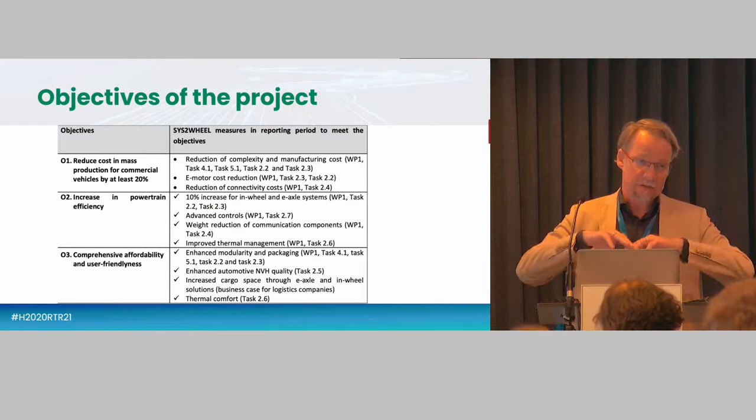Increase in powertrain efficiency - we get a little bit of increase from these components, but the vast majority of efficiency gain comes from efficient and advanced control. Weight reduction is another goal: we took many components out of the demonstrator vehicles, and of course added some components in, but in total we achieved a weight reduction.

The comprehensive affordability and user-friendliness - here we have to consider the special business cases for commercial vehicles and logistics companies. So the business cases require as much cargo space as possible and as few stops as possible due to recharging.

We, as Sys2Wheel, are part of a cluster of European projects where colleagues present their work. It's called the Evolve Cluster, which has its own homepage. For the projects on the list in this cluster, you find dissemination material, newsletters, and quite interesting results.

Going into detail of Sys2Wheel, we are currently looking at the N1 category vehicle - remember, this is the Fiat Doblo. The Fiat Doblo is equipped with an in-wheel system: in the front we have 2 in-wheel motors, and in the rear this special damping system is placed, where we freed as much space as possible for additional battery.

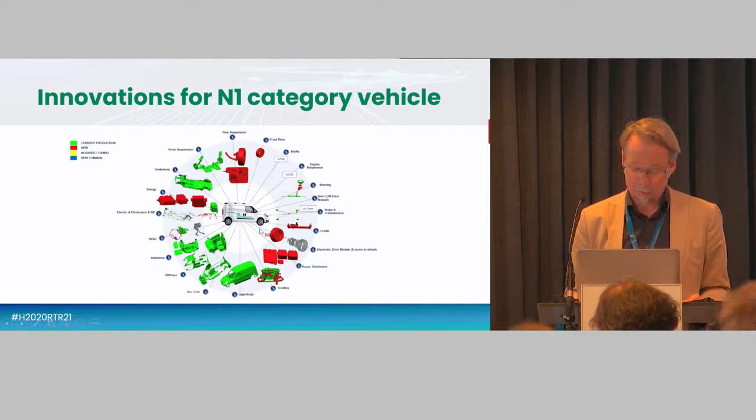Red is new, coming from this project. Green is the current production of the vehicle. Here you see the damping system, and here the in-wheel motor. The damping system has a very odd-looking design, I would say, but it has been tested for NVH issues, vibration issues, and mechanical properties, and is considered safe for automotive production.

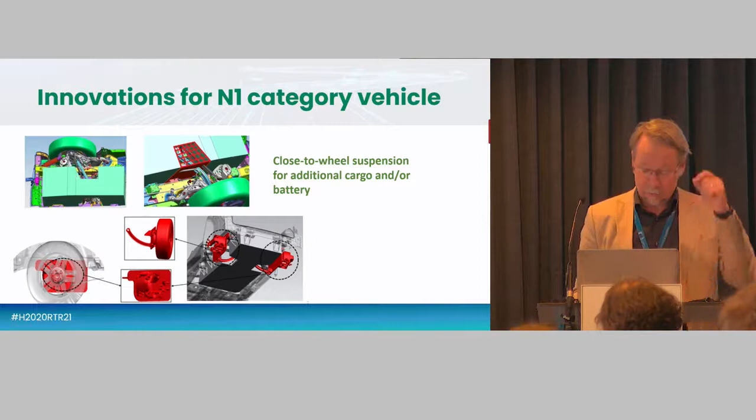Freeing the space in the center, here you see additional space available for the battery where no cells or modules could be placed before this development was installed. Here again you see the in-wheel motor in front, with additional battery space also here in the front, increasing the range.

Here you see a snapshot of the in-wheel motor production line, a specially designed machine where manufacturing is reduced to a minimum, and automated production of this e-motor is considered. The e-motors run on 400 volt DC, and are roughly about 74 kilowatt power.

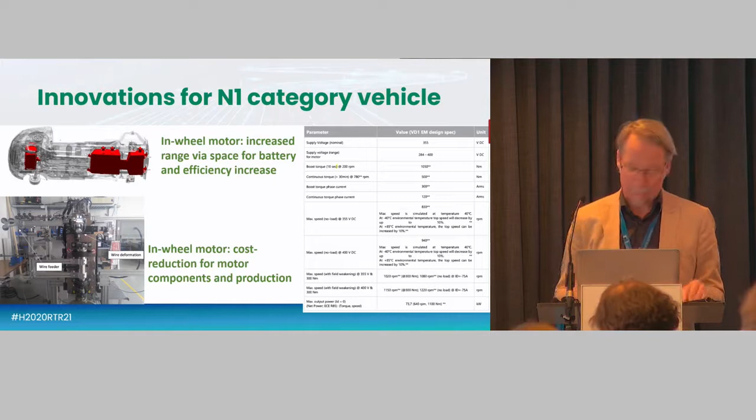So the vehicle is produced and assembled - so far we got in this project with all the innovations. Here in the rear you do not actually see the damping system, but what you see here is the in-wheel motors in front with additional space for the battery.

A new cooling system has been developed, also reducing weight to a certain extent. The inverter components in the underhood have also been developed by Elaphe. Additional features of this vehicle include improved thermal management, as I mentioned before, and a time-sensitive network.

The time-sensitive network - here especially we focused on in-wheel communication between components. The time-sensitive network enables safe communication in the vehicle using existing power lines, without the need for additional communication cables, freeing space and reducing weight by reducing cables for communication purposes.

Coming to the N2 type vehicle, the main innovation here is a fully modular e-axle system. So here you see a sketch of the e-axle, and this has been produced and currently integrated into an Iveco Daily.

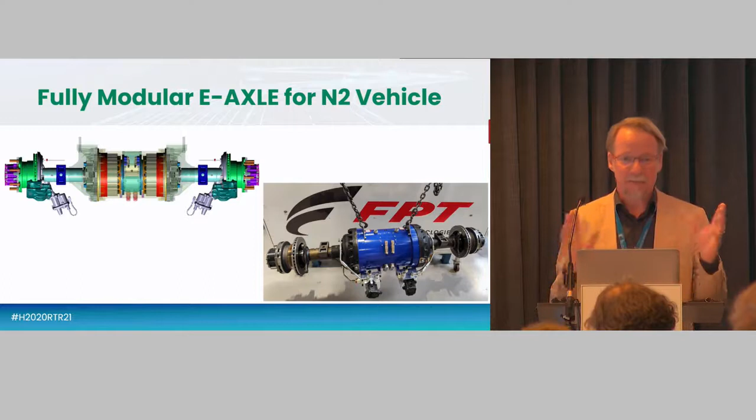Another feature is that the e-axle consists of two different motors that can be controlled separately. This means the e-axle can also realize some torque vectoring. Question is if it's needed in inner city traffic, but anyway, it's possible.

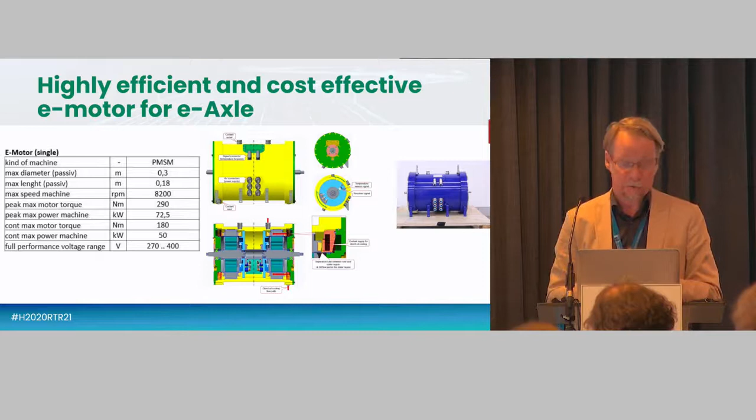Here you see the motor of the e-axle. So again, some 72, 74, 73 kilowatt peak power machine, and it runs on 400 volt DC, with an inverter in between, of course.

So, mid to long-term expected impact. These are, of course, the impacts that are required in the call text of the GV01 call, and which we meet, of course. But the more interesting thing is what happens also as some kind of side effect.

Of course, we have this from Elaphe, the in-wheel motors, and the market uptake here, the increase in the number of motors sold. Elaphe has already started to produce this type of machine and is trying to integrate it into other vehicles as well. The same for AVL, but there the motor is a completely new development, and this has to be tested. There have been some issues due to COVID-19, so the tests are still lacking.

For the FPT side, this fully scalable e-axle system is foreseen to be put on the market end of this year, beginning of next year. For Iveco, of course, the zero emission vehicle for last mile delivery is a selling proposition.

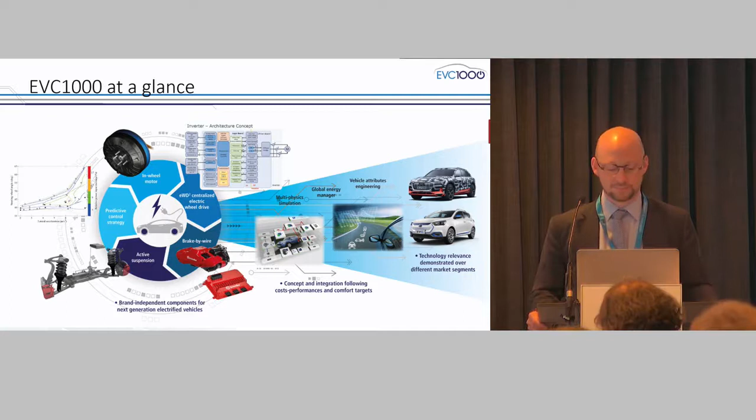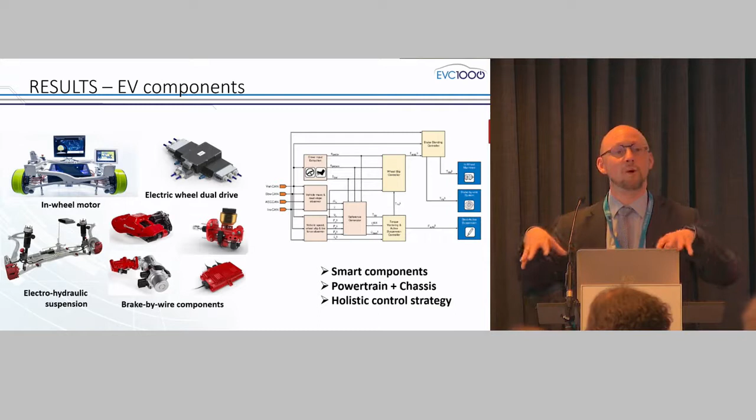In terms of results, in-wheel motor with a target to provide higher performance directly in the corner, to provide corner solutions for electromobility. Electric wheel dual drive with a target to have a better, more accurate and synchronous control of the e-motors. We will have as well a brake-by-wire component, in order to have more flexibility in terms of braking, and very similarly electro-hydraulic suspension.

For customer acceptance of electromobility, we need to improve range, reduce the cost of the battery, and take into account comfort and drivability aspects. This is the target to provide different kinds of components for the powertrain and chassis, providing all of them a higher degree of flexibility, and a more advanced and more integrated control strategy at vehicle level, to optimize locally the efficiency of the single component, and to optimize globally at vehicle level for a specific market, for a specific vehicle target.

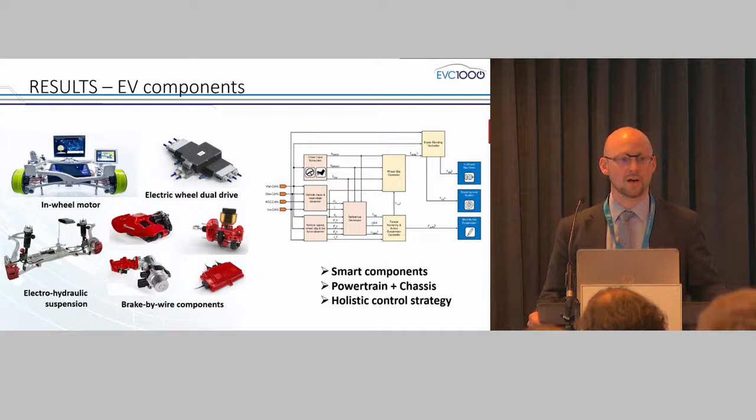Moving to the results, we are in the phase to finalize vehicle demonstration. This is ongoing work, a real picture. On the Audi vehicle, you can see on the left part the front corner with the brake system and the damper system, with Brembo and Tenneco. On the rear axle, the dual inverter mounted from Ideas & Motion, and on the rear corner, in-wheel motor, damper system, and EMB caliper as well.

We are in the phase to finalize vehicle demonstrators. We are in the phase of going for homologation in order to be in a position to make a 1,000 kilometer drive on public roads and showcase that these components are sufficiently mature for later exploitation, and are really in the position to achieve the targeted project objectives at the end of the day.

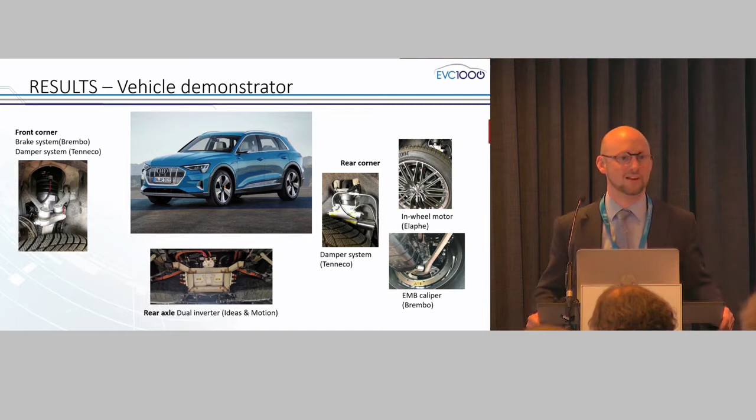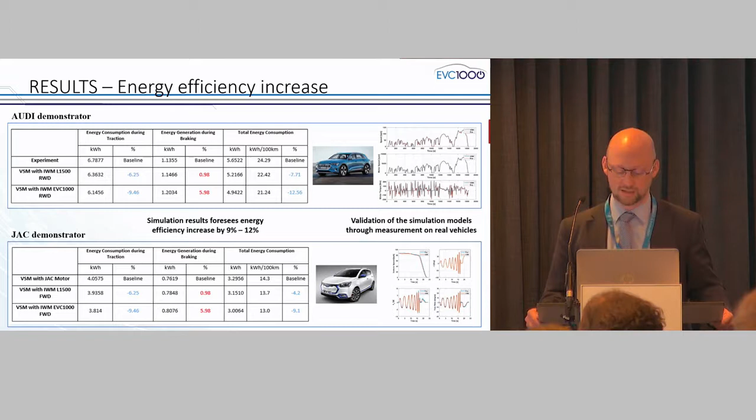Results-wise, very similarly to Bernhard, we have already aligned our project, and we are aligning our pitch as well. At the very start of the project, we preliminarily validated our targets by means of simulation. During our component development, we could then validate the component specific objectives, and for the remaining 3 months, we will hopefully validate these targeted objectives on a real vehicle. We'll have two vehicles in order to address these topics.

Collaboration, and I'm really happy to be here today, and I was happy to be there yesterday because some of the projects we are referring to were presented already yesterday or are being presented currently today.

Here we have active collaboration with related project initiatives, focusing strongly on the E-VOLVE cluster, so that we can really exchange with sister projects, I would say, increasing impact creation through this collaboration, exchanging on specific technological aspects. You have seen that in Sys2Wheel, for example, partner Elaphe was there to provide and further enhance their in-wheel motor solution for commercial vehicles. Here we have Elaphe further on in order to improve and tailor their technology for passenger cars. This kind of collaboration has been enabled and strongly supported by the E-VOLVE cluster in this context.

I would like to mention especially the operative collaboration with the XIL4EV project, and this is an error from my side, from the Vision XCV project as well, should be here as a second part. Rainer, please accept my apologies for that. This was very interesting, to have this tight collaboration with the GV02 project, providing innovative methods for the development, respectively for the validation, of EV components.

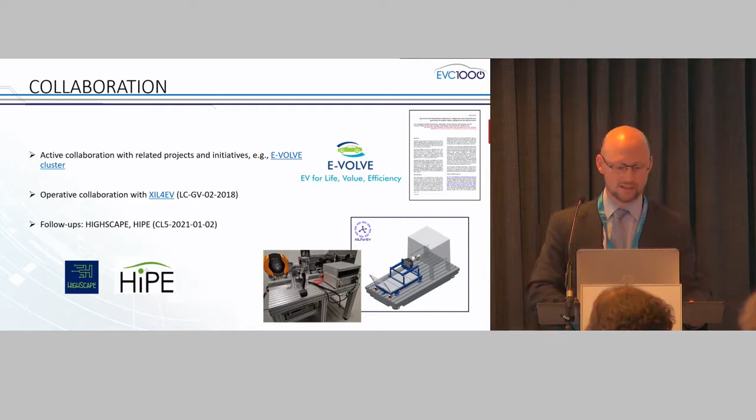In terms of impact, as mentioned at the very beginning, our target was to showcase how far these new components are scalable in terms of targeted market. This was with the usage of two vehicles, so we have the possibility to address the user-friendly, affordable EV market with a JAC vehicle, and the high-performance EV market with the Audi vehicle. So here, showcasing that these components are suitable and customizable for different kinds of markets.

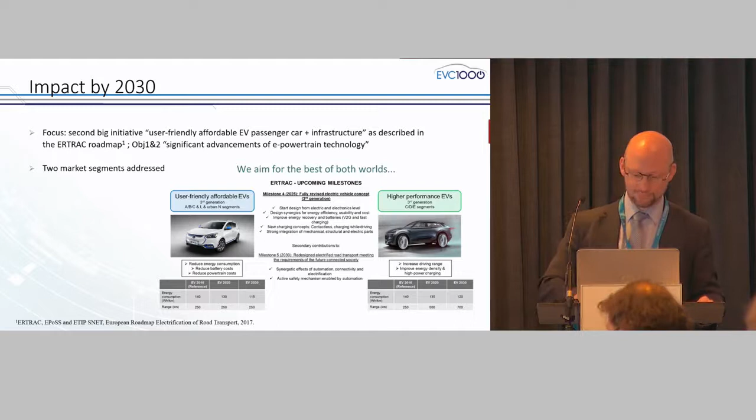Following, and the last slide from my side, here's the different question in terms of impact 2030, future research needs. To our opinion, the topic of technology convergence is a very important aspect, in order to provide innovative components which are then integrated for mission-specific activity. So here, the convergence toward connected automated mobility, the convergence toward smart mobility, and really tailored road application.

Expected market uptake for technologies and solutions developed in our project - here we have different stages of maturity. We have a component on one side which already has a high degree of maturity, and where this component will be soon available on the market. We have other partners, especially car manufacturers, who were very interested to explore the technology in order to have a sound basis to make a strategical decision on how far to move toward this technology, or what is the appropriate timeline to make this transition. So here, different maturity in terms of technology, but high interest, high commitment from all the partners.

A consortium plan to ensure follow-up of project activity - already mentioned different follow-up, a project already granted. And I'm really happy and proud to say that we already have bilateral collaboration that rose up out of this activity. The partners are interested to further collaborate together in a more bilateral aspect. So here, to my opinion, very strong success as well in this aspect.

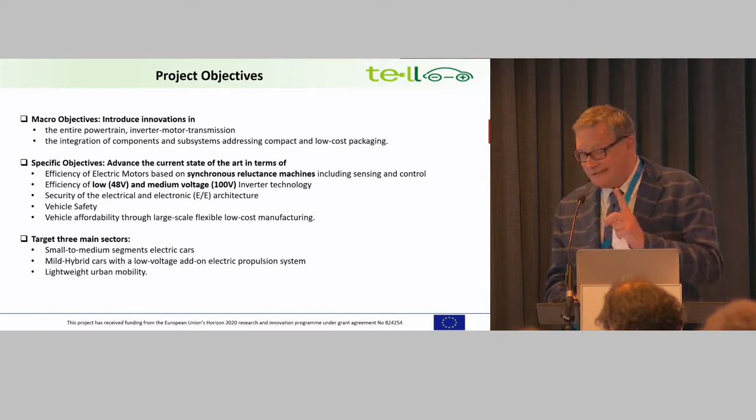I'm trying to respond to the questions of the organizers. So, where are you going? Also, with respect to the market, what is your perspective? Now, the objective of the project was to develop efficient powertrain working at 100 volt and 48 volt in these M1 and N1 urban electric vehicles. And we are targeting 3 sectors: small to medium segment electric car, mild hybrid - that was the first target, but things change - at low voltage, and lightweight urban mobility.

So let me start with the development, which I consider the state of the art in the world today, at 100 volt.

After they had these results, the paradox is that Dana, a small Italian company, presented this to an American company, and the American company purchased it immediately because that was the state of the art in the world, and remains so.

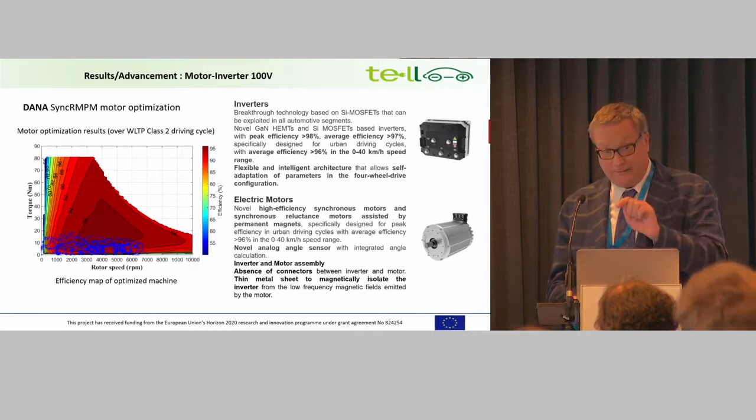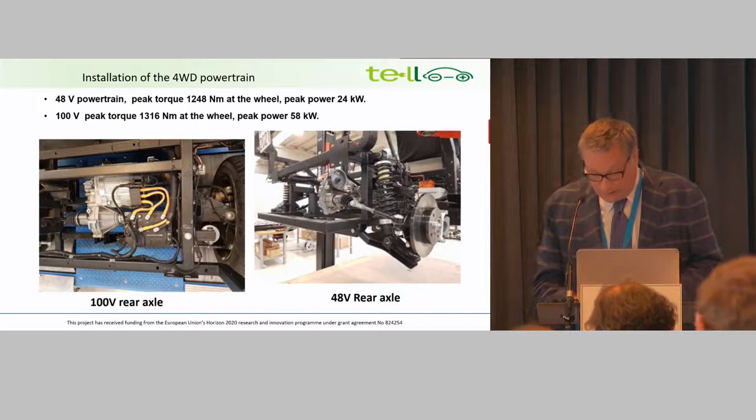So these are the two installations in the rear axle. We only have four-wheel drive in our technology - all our vehicles are four-wheel drive. Now let's see in terms of speed.

I'm going fast. At 100 volt, we tested the vehicle at 150 kilometers per hour, but we limit everything at 120. At 48 volt, the top speed we reached was around 110, but we limit the vehicles at 90 kilometers per hour. So this is what we are doing - tests are available, we made many tests in this direction.

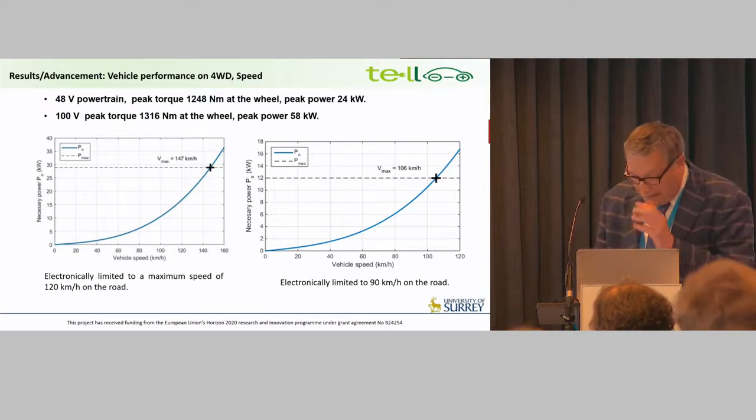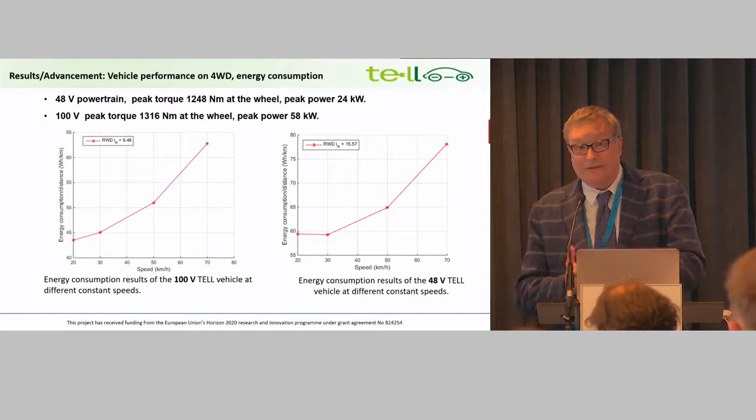Now, what about energy consumption? In the 100 volt we have... I personally like to know the energy consumption at constant speed before talking about urban drive and various technologies - I always like having an idea what happens at constant speed. At a constant speed of 30 kilometers per hour in the 100 volt, we have about 45 watt-hours per kilometer, and at higher speed, 52-53 watt-hours per kilometer. In the 48 volt, the energy consumption is a little higher because the voltage is lower, the current is higher, and you have higher losses in this direction.

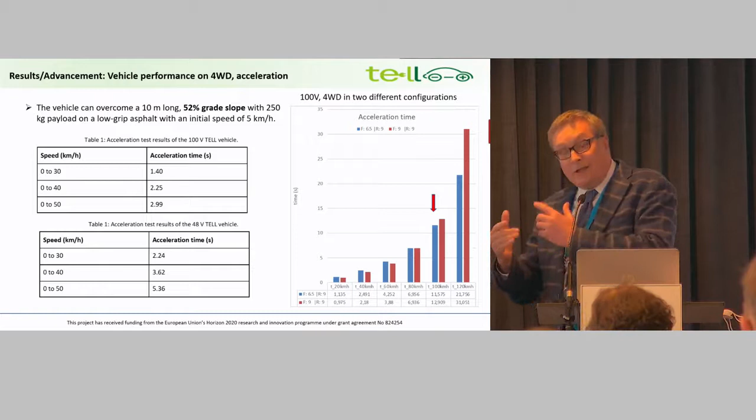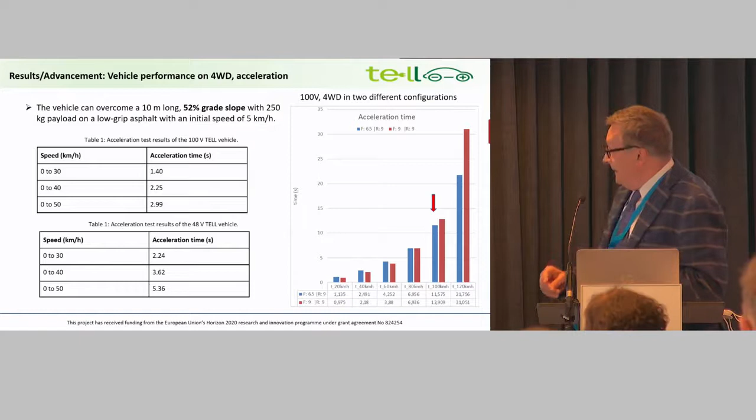Now what about acceleration? The 0-50 acceleration in the 100 volt - these are measured values, not simulation, I want to specify this - is less than 3 seconds. With the 48 volt, four-wheel drive always, we are in the 5 second range or so, which is acceptable anyway. I have to say that we are four-wheel drive, but specifically in the 100 volt we do not have the same ratio front and rear - we have two different ratios: 1:6.4 in the front, 1:9 in the rear. Why two different ratios? Because if you have the same ratio, 1:9, you increase acceleration at 0-50, but if you go to a lower ratio, you facilitate higher speed in a shorter time. So we decided to have two different ratios, not just four-wheel drive but two different ratios, and this is new - we didn't copy from anybody.

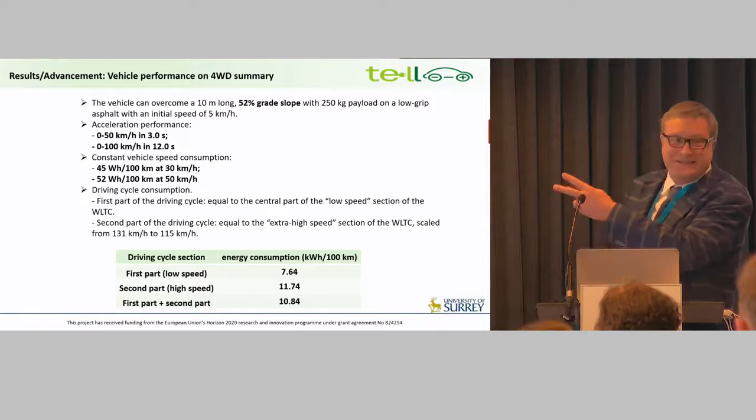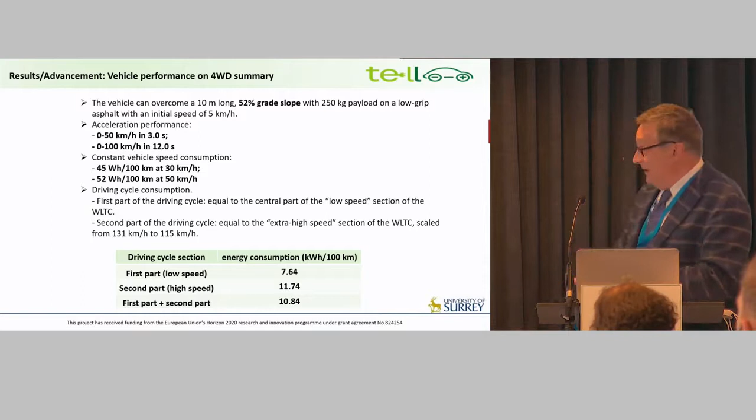In summary, the 100 volt: 0-50 in 3 seconds, 0-100 in 12 seconds. At constant speed, 45 watt-hours per kilometer at 30 kilometers per hour, 52 watt-hours per kilometer at higher speed - not 100, it was kilowatt, sorry, I made a mistake this morning. But people also want to know the average consumption in the WLTC cycle, and we are at 10 kilowatt-hours per 100 kilometers. So in terms of energy consumption, I would say it's quite good.

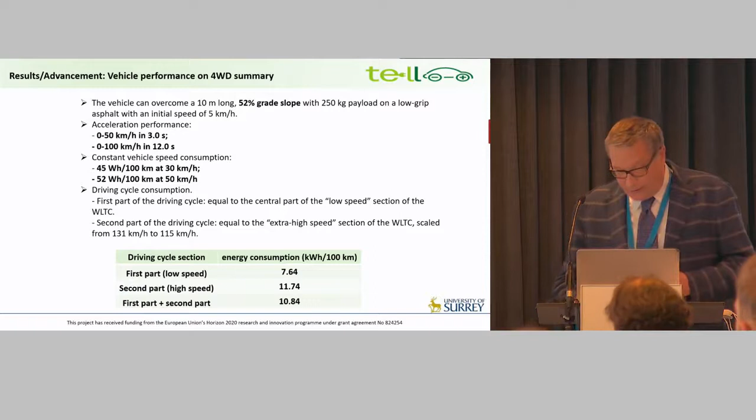I'm not going to spend time on vehicle control because yesterday Professor Sorniotti already explained in detail how we controlled the torque in the two axles to manage the vehicle on wet road, icy road, or soaped road, as we demonstrated.

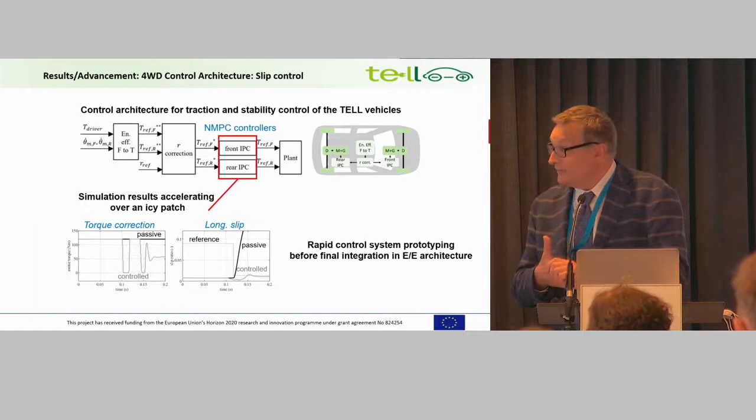So the control of the vehicle is really fantastic because the University of Surrey, from this point of view, is really, I would say, in Europe, if not the best, very close to the best.

But now I want to talk about what we did for the part that requires the investment, because people are talking about batteries and motors, but the real investment on making a car is not in the motor or the battery, it's in the chassis. So we spent a lot of time over the years, thanks to the European Commission, to develop a body frame that required very low investment.

If you compare the classical body frame with ours, we cannot explain how we make the battery envelope, because this is still very confidential and has a lot of know-how inside to reduce investment. We are state-of-the-art from this point of view.

In fact, ArcelorMittal has asked us, as another result of the project, to use our solution for the battery envelope for their customers. This is not a secondary aspect - no investment, against the many millions that people spend on making battery envelopes.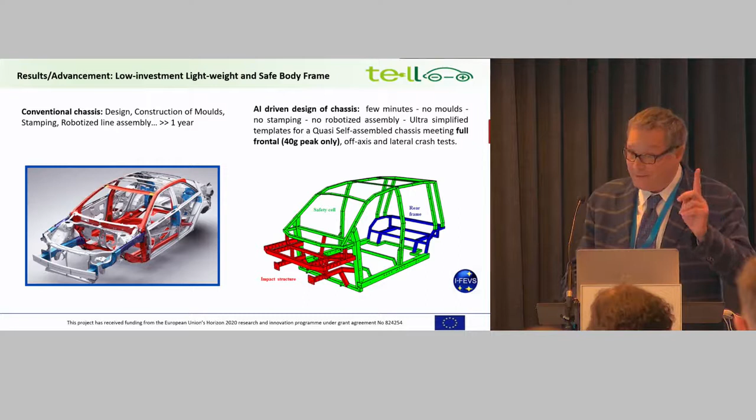So now we made crash tests. People in the automotive world understand that it takes many millions to make physical crash tests. Of course, we are a small entity, but thanks to collaborating with CIDAUT - Javier is here - we made all physical crash tests, using cars that we developed with doors produced in a production line for us and only for us.

So we have a pilot making these doors, and this is another result, because Magneto Automotive, producing the doors for us now, is also delivering doors to others. The investment to make this door only in steel - and we are the specialist on steel, as you will see later - requires only 15 to 20% of the usual investment on making doors in steel.

That's why people care, because today the upfront investment is what really matters in the automotive world, more than yesterday. So this is real production. The windshields are real production made by us, by Pilkington, only for us.

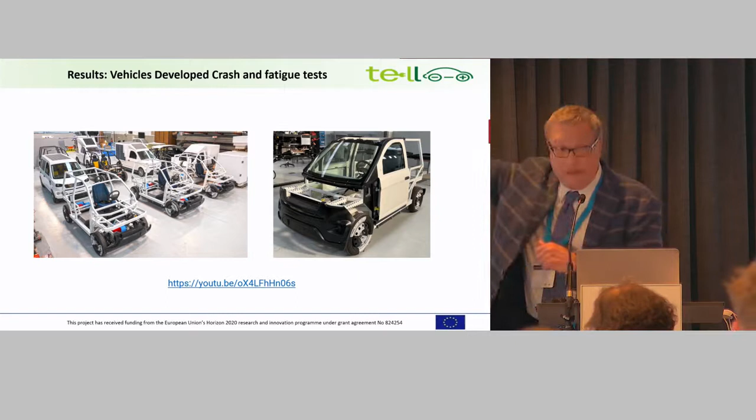And then the bumpers and everything - we only left some spaces to understand during the crash what was really happening in the absorption area. But we needed to make many vehicles for this project, a single project. So let's see... oh, sorry, excuse me.

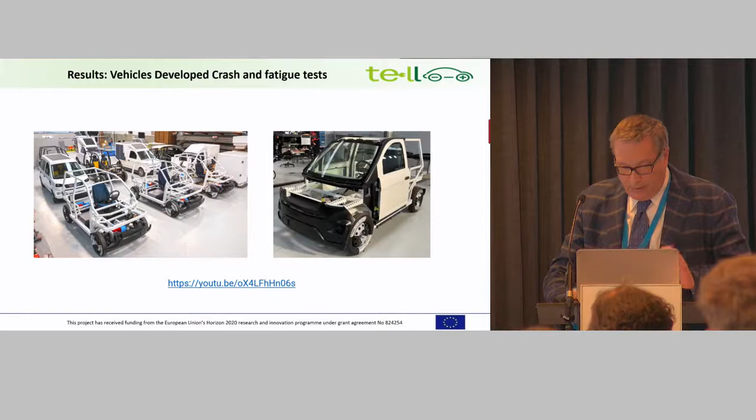I have to launch the 2-minute video of all the physical crash tests, proving that these are state-of-the-art results for this type of vehicle. No speculation, these are real. And also, CIDAUT is a specialist on this.

You see, these are real vehicles developed, but you will see now the physical crash test performed by CIDAUT. CIDAUT did indeed very nice work also to support us in the simulation.

These are the classical tests: the full frontal, lateral crash test, the off-axis. So this is the real test, and these are the results. You see that the result is lower than 40G, which is 15G less than what you have in city cars today in Europe - 15G less.

This is the off-axis, and you see the performance of the off-axis. First of all, no breakage of the windshield. You see that all biomechanical parameters are lower than what the regulation is asking.

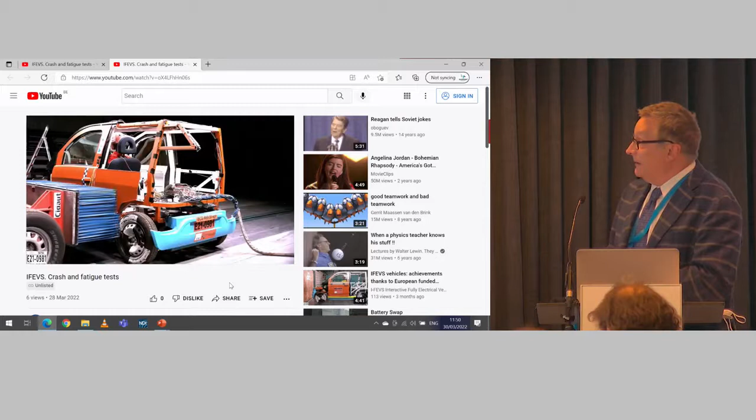You see the lateral crash test here also, and the parameters for the lateral crash test are very good - I would say state-of-the-art for this type of vehicle, certified by CIDAUT, which is a specialist in this.

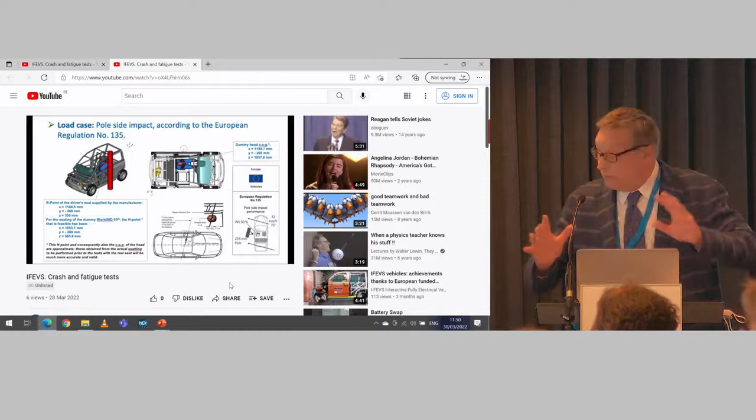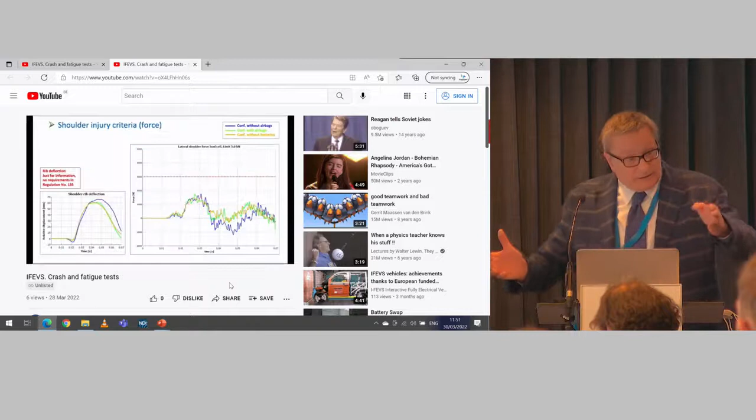Then, we still don't have the real field test, but we made the simulation. We understand that we are very close to what the regulation is asking for the pole test as well. One vehicle is still there to finalize this aspect, because the project is finished, but we are continuing in another project, Multimobi, to comply with this.

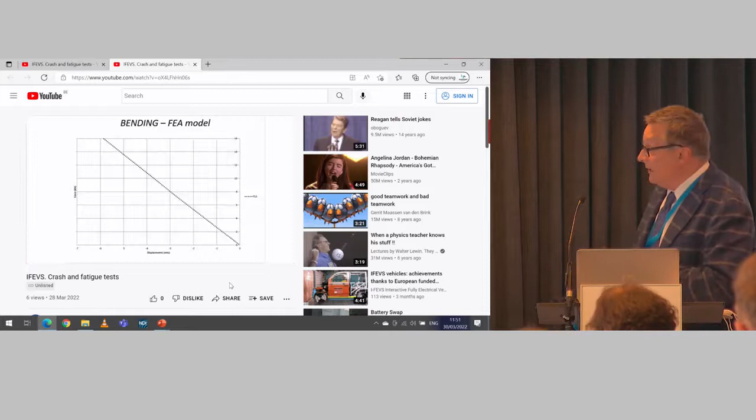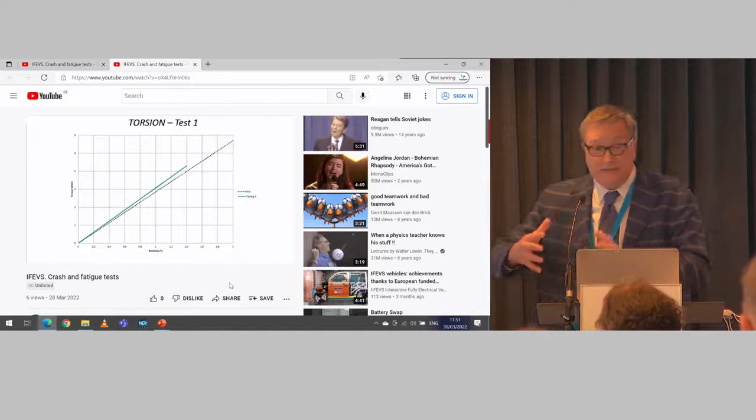Then we did various torsional and bending tests, 1 million cycles here to test the body frame, because we want safety first of all. I can confirm that the results here are very good - there are no cracks, no deformation in the body frame after 1 million cycles, as the regulation requires.

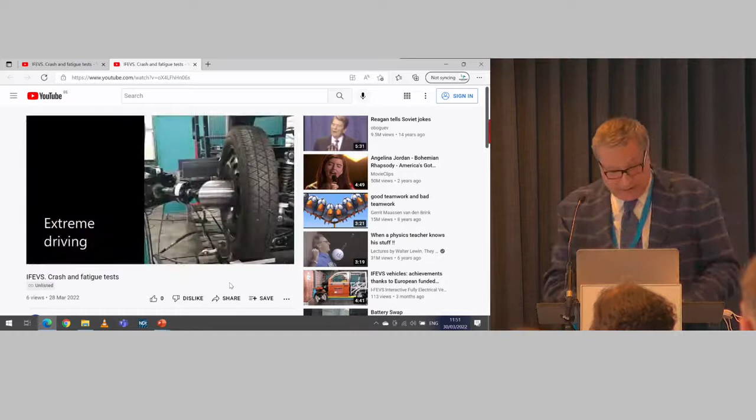So I would say that we have finished this part of the presentation. I can close here for some seconds and continue with the presentation, I hope.

So now the real vehicles are really there. We have the same body frame for all cars, whether it is a pickup, a passenger car, or a van. The body frame is the same.

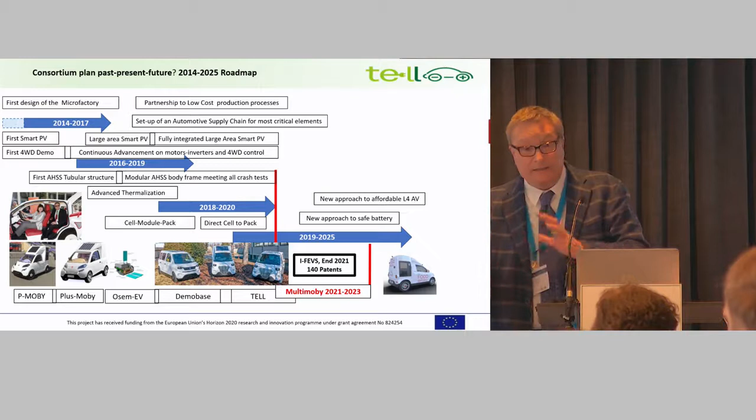We are continuing now looking with Multimoby at a new approach towards autonomous driving without lidars and without radars, but using gimbals, infrared and visible cameras, and we are coming to that point.

What is also important as a fallout of the project is that we are specialists in steel, and we want to develop bikes because bikes is the game coming. We use the same technology that we used for the body frame to produce bikes using only super high-strength steel, tubular and metal sheets, as you see on the bottom. We have 20 patents just on this.

From next week we will start selling bikes, and these bikes we will pre-sell. But in June we have been invited by the European Commission to make a roadshow at the Bauhaus Festival. And now I want to provoke you with two slides.

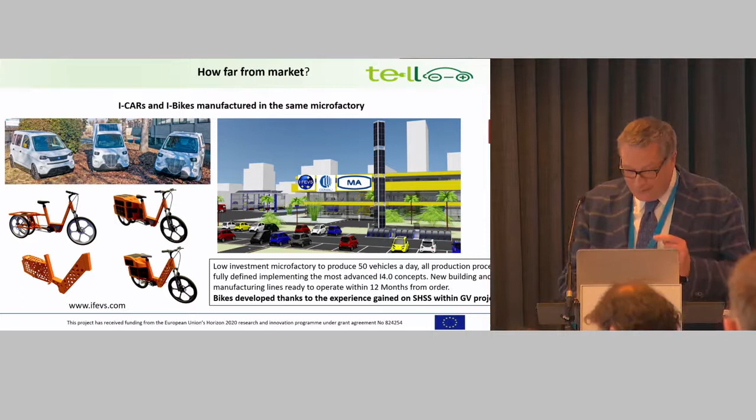Look at what's going on in the bike market. If you look at 2022 to 2030, you see that there will be a need for 100 million e-bikes in Europe. By the way, for every electric vehicle sold today in Europe, there are 6 e-bikes sold. And the number of kilometers run by e-bike is 30% more than the number of kilometers run by cars. This is official statistic today in Europe. So we need 100 million e-bikes by 2030.

This is a fact, a conservative projection from CONEBI and all the cycling associations. Conservative, I stress. And now, the most impressive slide.

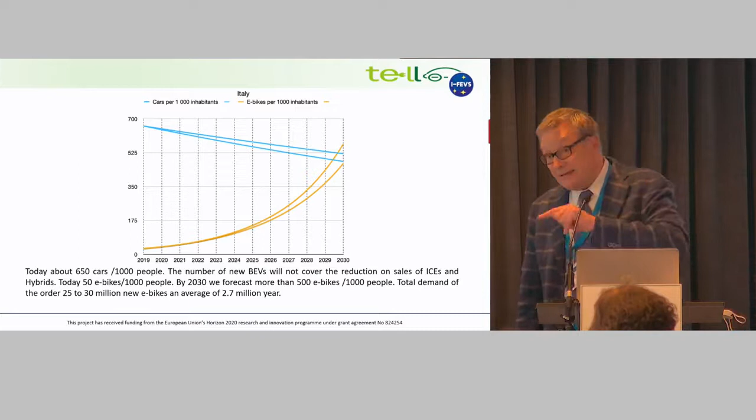Have a look at Italy, Germany, France, Spain, almost all the same. Today we have 650 cars per 1,000 people altogether. And in 2030 the number of cars per 1,000 people will decrease. This is a positive point of view, because the negative is much less than that. But the number of EVs will not replace the number of internal combustion engine vehicles. This is taken for granted by almost everybody.

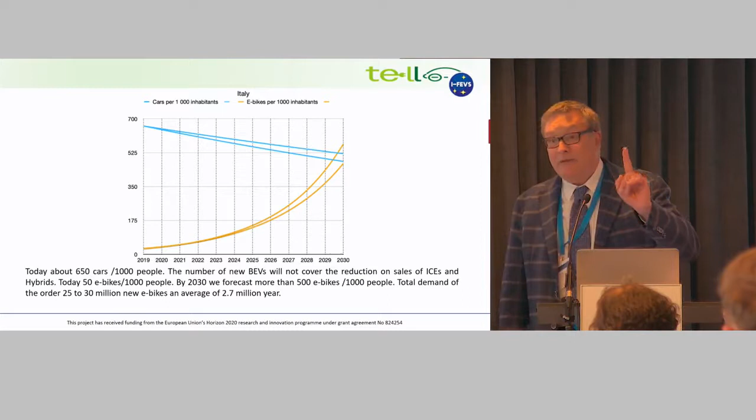But look at what's going on for the bikes. Today we have 50 e-bikes per every 1,000 people. If you look at the projection I showed before, in 2030 in Italy we will have 500 e-bikes per 1,000 people. Whether you like it or not, this will happen. This is a conservative projection, not a speculative one. So the bike world is exploding.

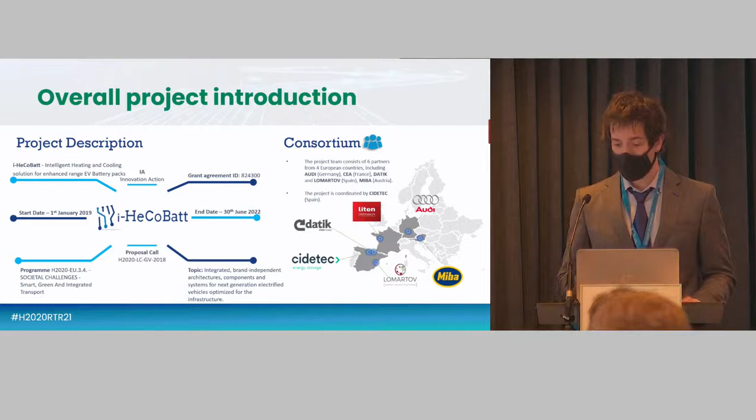Thank you. So the i-HeCoBatt project is focused on intelligent heating and cooling solutions for enhanced range electric vehicle battery packs. We have seen different improvements, but this is focused only on the heat exchanger and the thermal system. The i-HeCoBatt project started on the 1st of January 2019 and will end this year on the 30th of June. Just to mention, we are a small consortium of 6 partners, where CIDETEC Energy Storage is coordinating the consortium, and we have Audi, MIBA, another research center that is CEA, Lomartov, and DATIK.

This project has 5 main objectives. The first is to increase the powertrain overall efficiency up to 5%. The second will be to reduce the total cost of the whole thermal system at least 20%. The third will be to integrate new components and functionalities. This will be the smartness of the project, leading to higher user friendliness, reduction of range anxiety, and reduction of temperature impact on the degradation of the battery pack.

The fourth will be to achieve automotive class quality, which we have achieved thanks to Audi being involved in all the work packages. And then generate demonstrations to show the efficiency increase and addition of new functionalities in the vehicle. In this case, what we have done is a prototype of the heat exchanger assembled in a battery pack, tested at lab level. We have also developed a B-sample, an industrialized version of that prototype, in a virtual way.

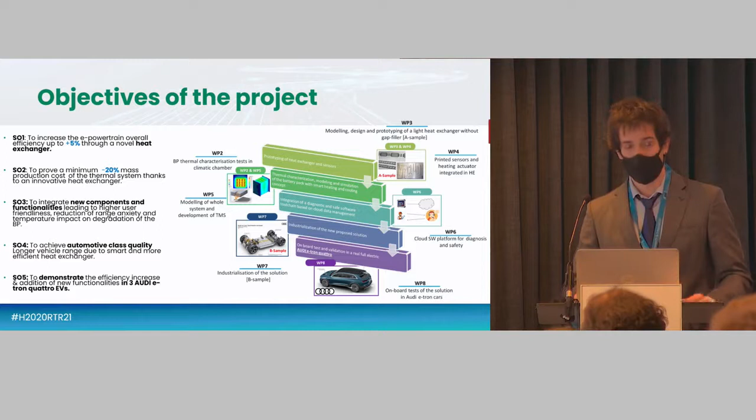More or less, you can find here the workflow of the whole project, but what is important is the result of the project. We have 3 months to finish the whole project, and we have already gotten some values of the KPIs and some results.

The first one is that we have been able to design and manufacture a heat exchanger based on Miba's flex cooler technology. Here are some examples that you can find on Miba's webpage. And this has been assembled in an Audi e-tron battery pack.

Additionally, on the designed heat exchanger, we have printed thermal sensors and heaters, heating actuators, which simplifies a lot of the assembly process of the whole battery pack.

And here we have some values, where some of them are not completely quantified, but I wanted to highlight that we have reduced 22 kilograms of the whole battery pack, and also that we are able to provide more energy, so we heat the batteries more, while requiring less cooling power from the thermal system.

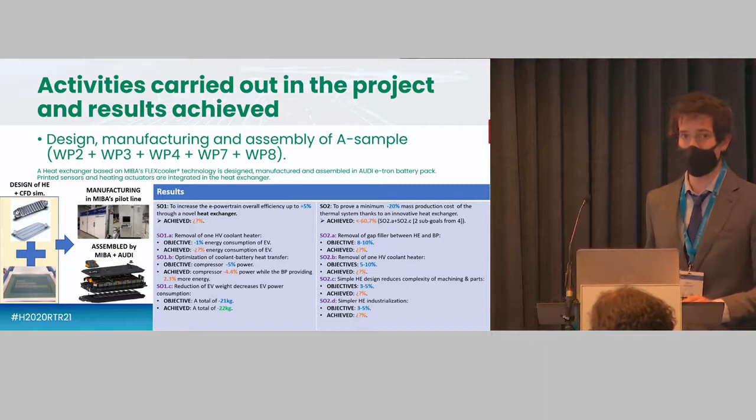And then in terms of cost, there is a problem in this case, because it's not simple. It is not direct, the changes we have done into the thermal system and the sub-objectives we had. We have seen that the main cost reduction, almost 99% of the quantified one, comes from the removal of the gap filler between the heat exchanger and battery pack.

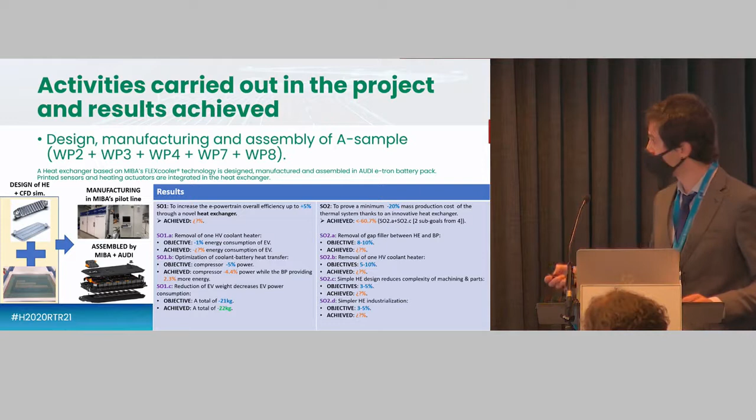And in this case, the simpler heat exchanger design with less complexity accounted for around 1% of this, for a total reduction of 60% on the cost.

Then another result of the project has been the work done by the two research centers, CEA and CDTech, regarding the modeling of the battery heat exchangers and the battery pack itself.

We developed a modeling library in MATLAB Simulink that, thanks to the CFD simulations, reduced considerably the computational cost of the modeling.

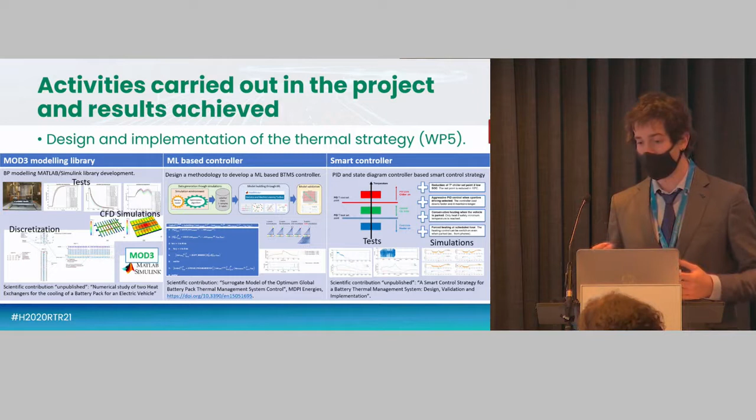Then, to address all the smartness and additional value of the project, we also developed a smart controller that will be presented at a conference in May, and will be published as proceedings in a journal.

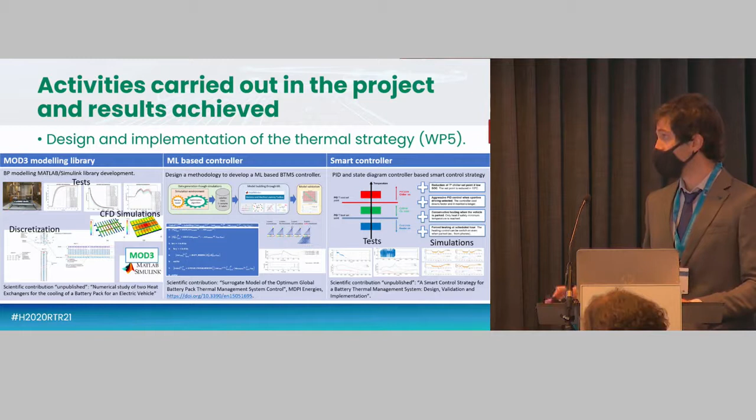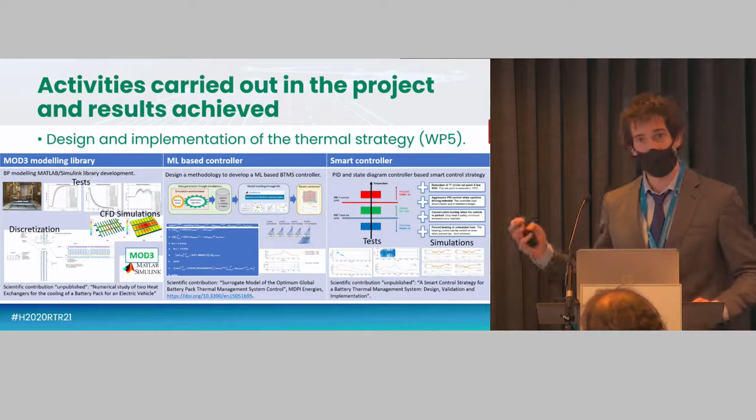And in parallel, we also developed and validated the concept of a machine learning-based controller, which is available in MDPI Energies. These results are public, so you can check them and use them for your projects, of course.

This will make the bridge between the vehicle and the user. The user, or even the OEM, will be able to observe in real time what is happening in that battery pack.

And as well, integrated via simulation blocks, they developed a thermal control strategy.

And then we were able to get a relevant reduction in carbon footprint impact, human health impact, ecosystem diversity impact, and resources availability impact.

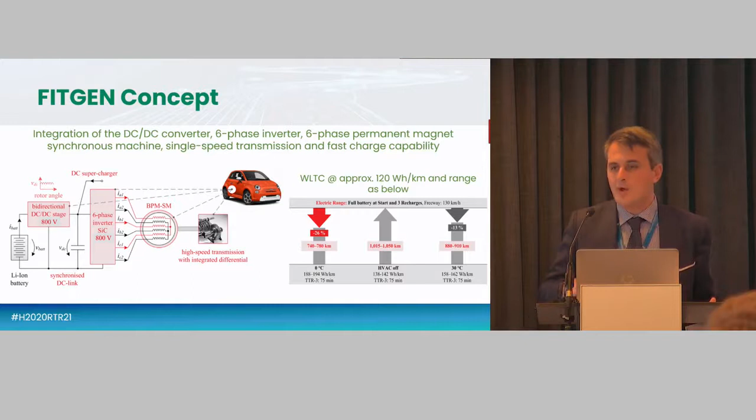The inverter is fed by the battery, but there is an extra element between the battery and the inverter, which is a bidirectional DC-DC. The DC-DC aims at stepping up the voltage of the battery from 400 to 800 to feed the 800-volt powertrain, but also to enable super fast charge, accepting 800 volt to recharge the 400-volt battery. The overall design of the FITGEN e-axle is also fit to be coupled with an 800-volt battery by removing the DC-DC, which makes the overall architecture quite flexible and ready for different applications in different platforms.

This is the FITGEN implementation plan. Beyond the definition of the detail of the electrical architecture of the axle, the project is built around 3 main technological work packages, shown here as the core: WP2, WP3, and WP4, each of which aims at delivering a technology brick of the axle itself.

Area 1 tackles the power electronics, delivering the silicon carbide inverter, the DC-DC converter, and the fast charging enabler. Area 2, which is all about the motor, delivers the high-speed permanent magnet electric motor and the transmission. Area 3 is devoted to the design of the cooling circuit and the control algorithm.

Everything converges into WP5, which is about prototyping of the components, assembling of the axle, and testing and qualification of the axle on the bench at TRL 6, to step up in WP6, where we have the vehicle integration and the demonstration of the axle at TRL 7. On top of that, we have, as usual, exploitation, dissemination, communication, and project management.

We stand today here at the end of WP5. We are in these weeks completing the test of the axle in our drive laboratory, and we will be ready in April to ship everything to Torino for final vehicle integration and vehicle demonstration.

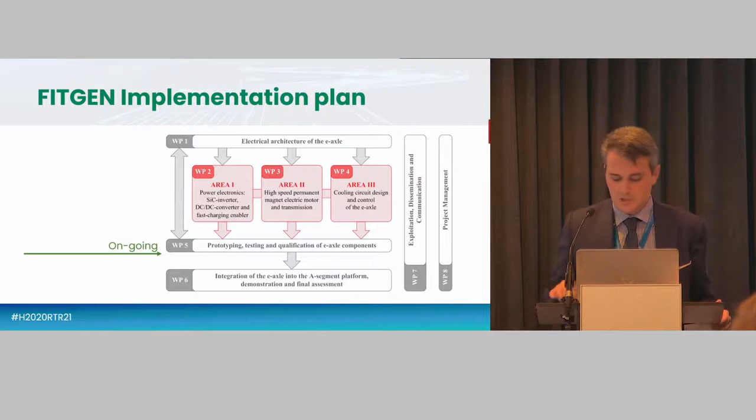The motor is based on a synchronous approach with a patented rotor shape and delivers very high performance and very low torque ripple. It's equipped with 1.3 kilogram of rare earth-based magnets and with a patented formed Litz wire winding technology for reducing losses. We were able to achieve at the bench 23,000 RPM, which is quite beyond state of the art as per today, of max speed.

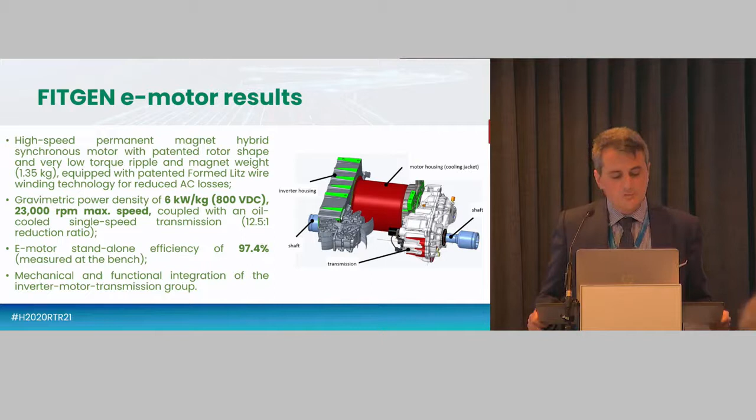We also conducted at the bench a sustained overspeed test, sustaining 27,600 RPM for 30 seconds without any mechanical failure in the axle. The motor standalone is capable of delivering up to 6 kilowatt per kilogram, pushing the envelope at 800 volt VDC, and it's coupled with a single speed transmission with a reduction ratio of 12.5 to 1. The e-motor standalone efficiency measured at the bench is 97.4%.

Moving to the inverter, which was another area where we invested many resources. The design is completely brand new, based on a cascade architecture. We have two three-phase inverters connected in sequence with surface-mounted devices implementing the next generation silicon carbide switches from STMicro. We have a housing volume of 5 liters, and were able to deliver 35 kilowatt per liter peak, also at 800 volt VDC. Here you see an exploded view of the inverter design with all components inside.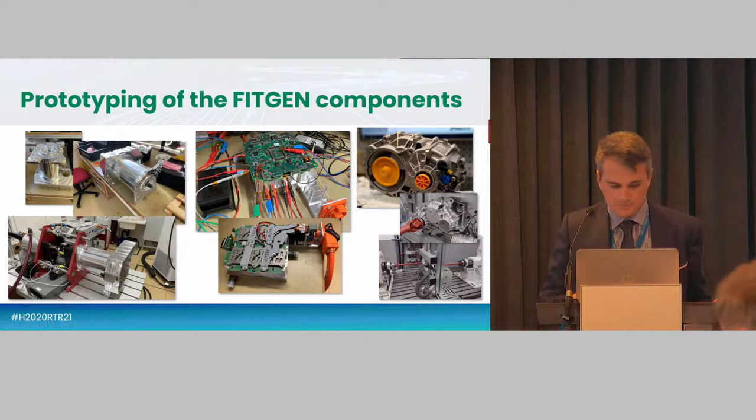Finally, the overall FITGEN e-axle in full assembly. This is the first of the two prototypes we have delivered. We have two working prototypes - duplicating always increases reliability. It's a risk mitigation measure.

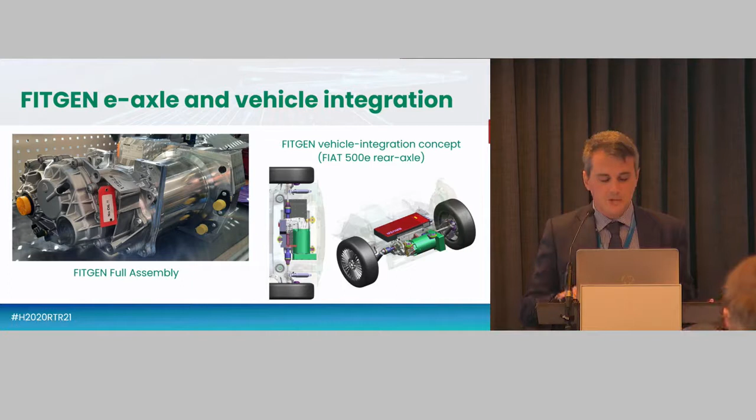The DC-DC that you see here, basically this red box, is at the level of the trunk. So we are freeing all the space in front and on the back of the vehicle, enhancing the usability of the vehicle itself.

Some results about the testing. These are tests at TRL6 on our bench. The axle was capable of delivering the full WLTP driving cycle, and we measured very good values of efficiency, distance, specific energy consumption, and torque and current ripples. We have over the WLTC below 1% torque ripple against a 3% industry standard, so this is quite smooth operation of the axle, and below 5% current ripple.

On top of this, the axle is quite energy efficient. We don't have the final number yet because we are repeating many measurements, but we measured in the first phase 127 battery-to-wheel watt-hours per kilometer, which is well beyond what is delivered today by the best-in-class market available technology.

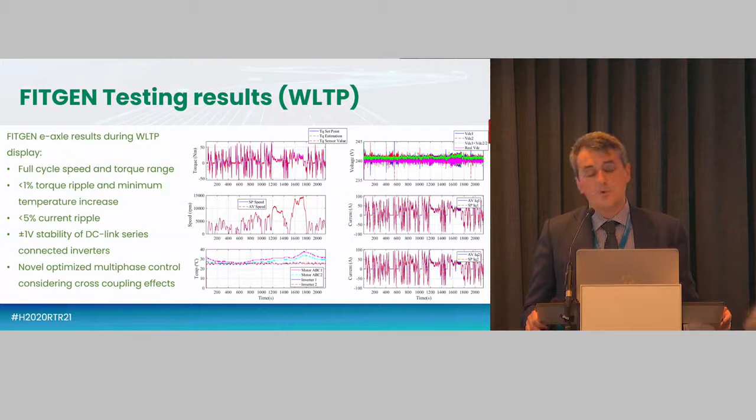We can see a peak temperature of the motor of 37 degrees in phase 4 of the WLTC, which is excellent. This also strongly suggests that we can push this technology further in the thermal envelope, and extract even more performance from what we have done so far.

Some conclusions and mid to long term expected impact of the project. Again, we were able to extract up to 6 kilowatts per kilogram against an initial target of 5 kilowatts per kilogram, so we were quite happy with that.

Materializing a plus 70% improvement compared to the state of the art 2018, that was the reference of the project, and a good 40 to 50% compared to the state of the art 2022. What I'm doing now towards the final part of the project is also comparing FITGEN against the best-in-class technology today, not when the project was granted. We were demonstrating 23,000 RPM, beyond the target of 18,000, which is 28% more than the best-in-class market available technology as per today, and 35 kilowatt per liter power density of the inverter.

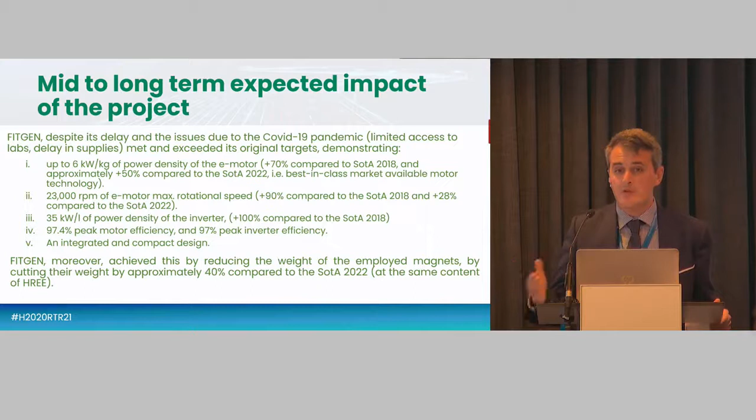One side benefit that was not initially planned for FITGEN is the reduction of the weight of the magnets. Thanks to the design and to the high-speed operation of the motor, we were able to reduce the magnet weight by 40% compared to the state-of-the-art 2022, where state-of-the-art 2022 is basically the average between Tesla 3 and Volkswagen ID3. We were not performing research on the magnets, so we were not aiming at reducing the percentage content of rare earths, but we were reducing the weight of the magnet, so intrinsically we were reducing also the content of rare earths overall in the motor.

Concluding, FITGEN is at the present one of the most performance-dense prototypes of the axle in Europe, to my knowledge, and it's an excellent technological basis for advancing further this technology. I'm also thinking about what FITGEN did not do. FITGEN did not perform any work on the magnets, just relying on the best-in-class technology available for purchase, so pushing in that direction would even further improve the overall design. Also, although complemented by an eco design and an LCA, FITGEN did not do a full recycling demonstration, and this is something that is also on the roadmap for developing after the project.